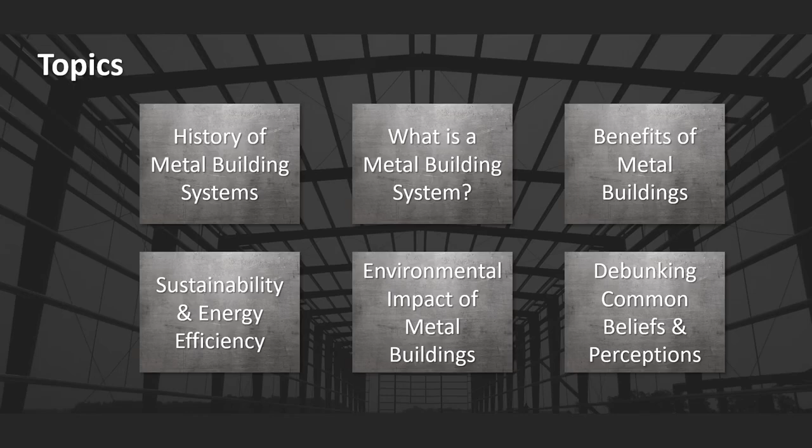So, when did the rise of metal buildings begin? It dates back to 1917 with the Austin Company in Cleveland, Ohio. They had 10 standard designs, which is where the term pre-engineered originated, since the designs were created in advance and were sold as an unmodifiable package.

Then in the 20s and 30s, the oil boom in the West created the need for quick and simple-to-construct buildings to provide storage and basic shelters. The young but burgeoning metal building industry was quick to respond.

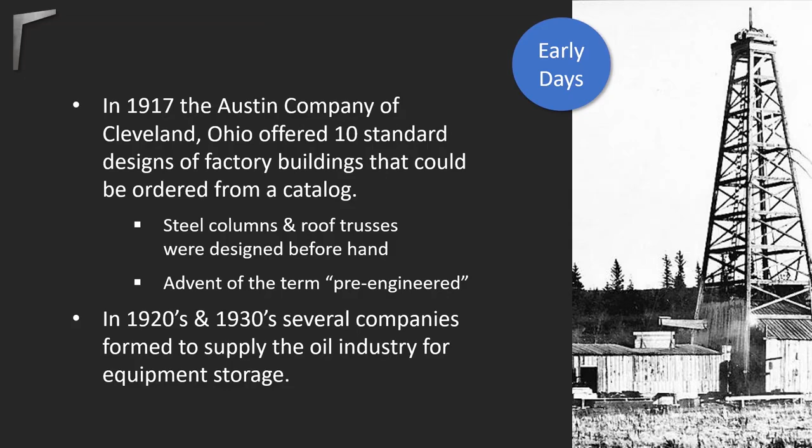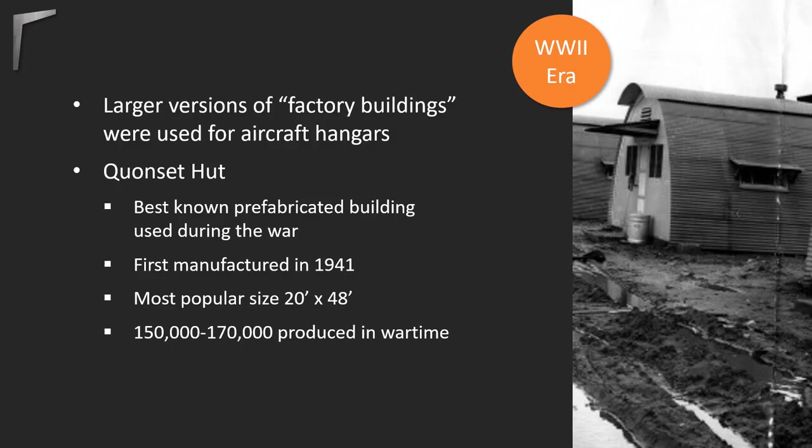The use of metal buildings increased during World War II when large metal buildings were used for aircraft hangars, but most people identify early metal buildings with the venerable Quonset hut. Between 150,000 and 170,000 of them were constructed and in use by the end of the war. They were highly effective because they could be constructed quickly by military personnel and could serve multiple purposes.

What happened next changed the face of the construction industry: the rapid growth of industrialization. The manufacturers that had produced all those Quonset huts needed to shift directions because their main customer, the U.S. Army, no longer needed the building inventory once the war ended.

At that time, building manufacturers began producing low-cost, quickly installed factory buildings that satisfied the post-war economic boom. They were actually called boom factories. The structures were relatively inexpensive utilitarian buildings that served an important purpose. They housed the machinery, systems, and workforce that would provide the products and services that fueled America's rise to prominence as a world superpower. This utilitarian role is still foremost in the minds of some designers today, but metal building technology has evolved to allow for much more.

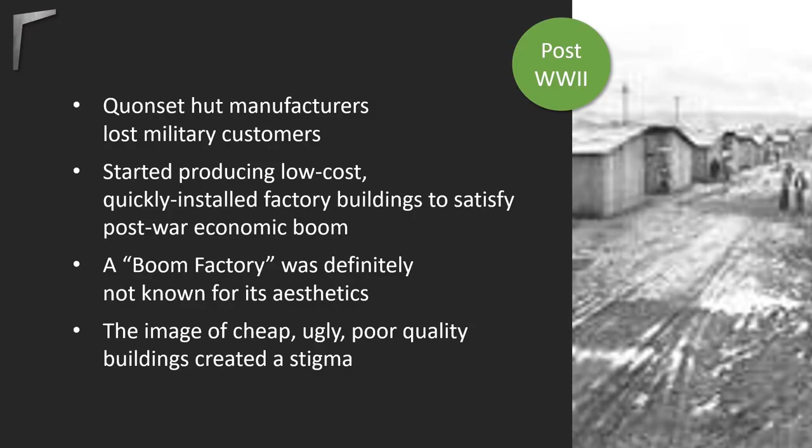A metal building system is a custom-engineered steel solution that optimizes and integrates steel framing, roofing, and walls. It is the most popular low-rise commercial building solution in America.

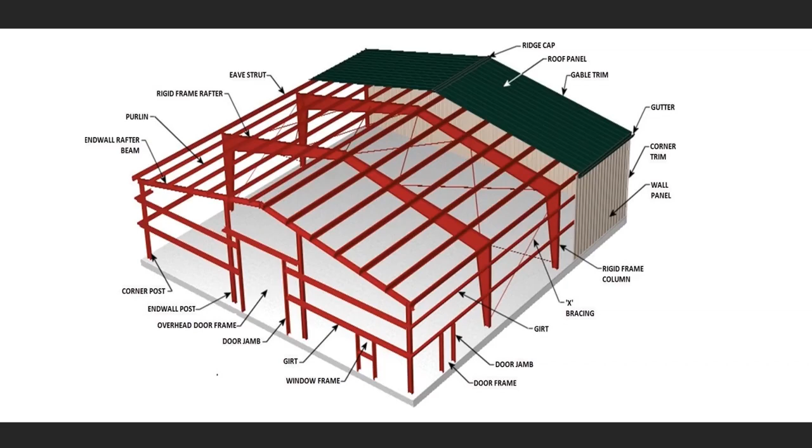The basic elements of the metal building system are primary frames, which are the structural steel members, secondary roof members, which include cold-form steel purlins or steel joists, secondary wall members that are cold-form steel girts, a metal roof, and wall cladding systems. While the interiors and exteriors can look completely different based on the owner's requirements, the basic elements of a metal building system remain constant: rigid frames, wall girts, roof purlins, cladding, and bracing. These common elements provide for economy without hampering design flexibility and creativity in the end product.

One thing that distinguishes metal building systems is their surprising variety due to the flexibility allowed through different combinations of wall materials. In fact, it can be difficult to identify a building as a metal building system from the street. Since the structural steel frame bears the load, there are options for architectural or industrial metal walls, brick, glass, wood, masonry, EIFS, tilt-up, and insulated steel wall panels or other materials.

Metal buildings have evolved from standardized designs to custom designs for every single building produced. Metal building systems employ advanced computer-based engineering and drafting technology to create building solutions that align with each customer's exact needs.

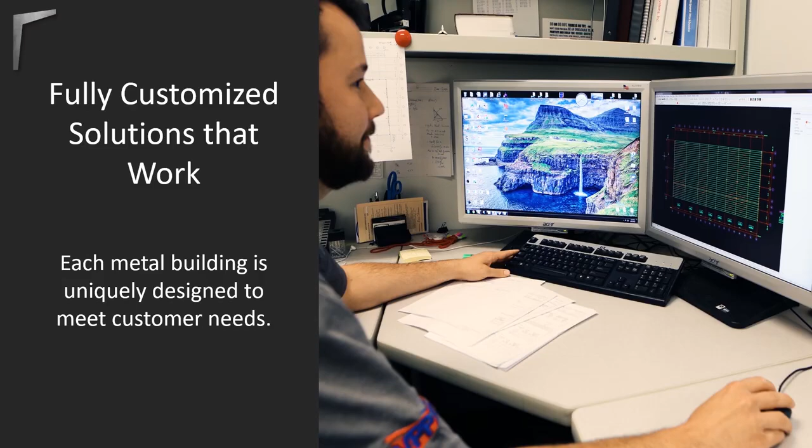One important attribute is design flexibility. The buildings allow for impressive clear spans, eave heights, and easy expansion for a range of building sizes. In using this type of framing system, there are buildings today with clear spans in excess of 400 feet. Large clear span spaces are needed for many applications.

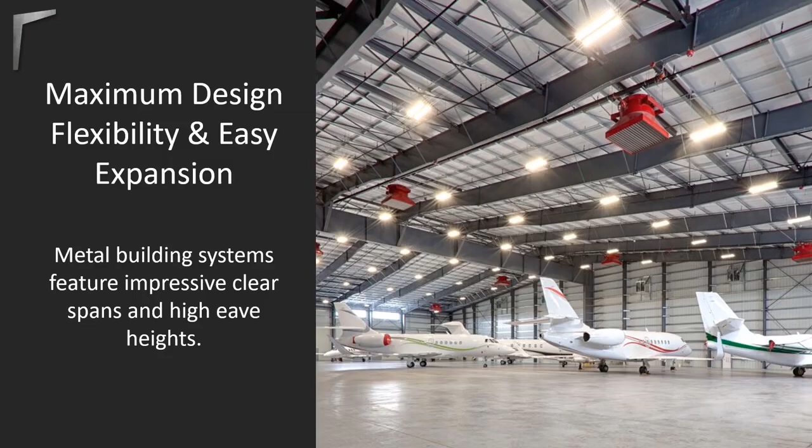For example, metal buildings make practical facilities for housing aircraft and for performing aircraft maintenance. Such wide-open spaces are equally valuable for manufacturing, warehouses, and showrooms. The high eave heights also make for a popular solution for recreation facilities, as well as university, pro football, soccer, and baseball team practice facilities.

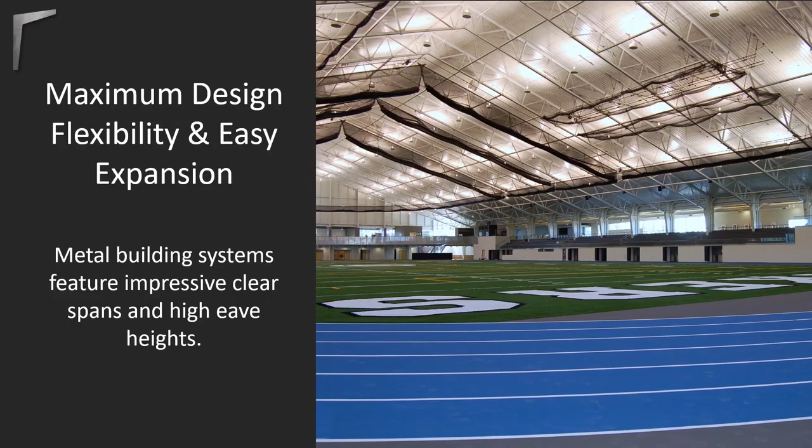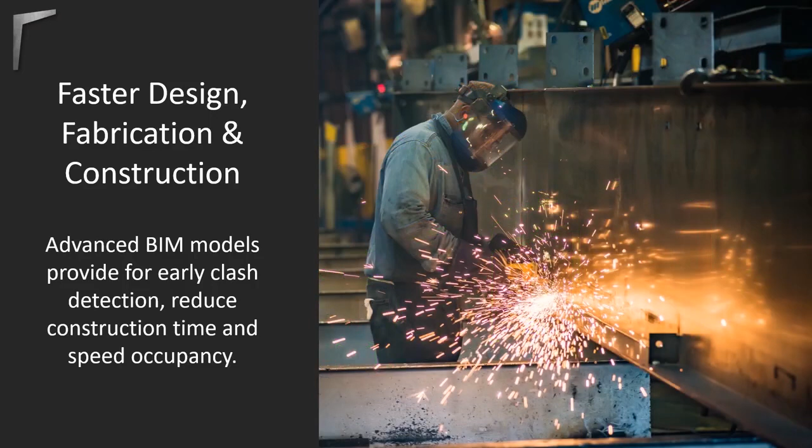Speed of delivery is a key advantage with a metal building. Building information modeling is used by metal building manufacturers to contribute to the overall efficiency of the project and to help integrate and visualize other systems within the building project. Once the building is designed, it can be manufactured in as little as 2 weeks. On a job site, they can be erected quickly.

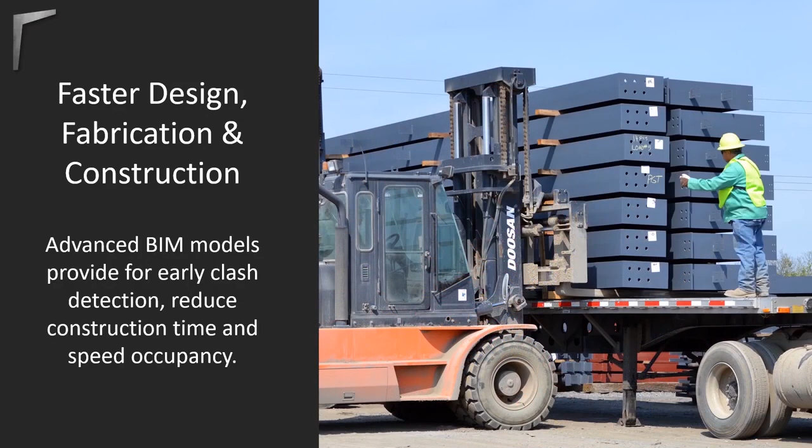The parts and pieces of the complete metal building package are delivered as a single-source package to the job site and received by a qualified erector who shakes out the shipment of materials to ensure everything has arrived. Once the project is staged on the ground, the metal building shell goes up much faster than conventional construction.

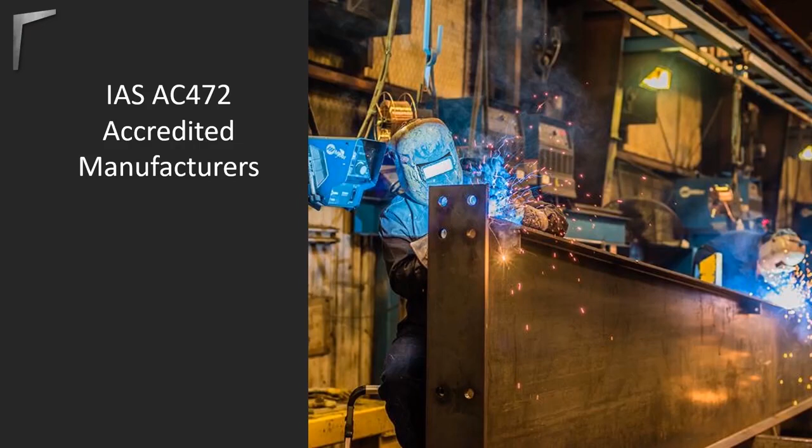Metal building system manufacturing firms that are members of MBMA are accredited under the International Accreditation Services AC 472 Inspection Program for Manufacturers of Metal Building Systems. AC 472 is a comprehensive accreditation program based on the requirements of the International Building Code.

Building owners have found that purchasing a building from an accredited manufacturer provides many benefits. These include compliance with the special inspection requirements in Chapter 17 of the International Building Code, expedited acceptance of plans by code officials, better protection for occupants and contents, lower insurance rates, lower maintenance and utility costs, and better resale value.

Each metal building is designed using lighter cross-sections and higher strength steel than conventionally framed buildings. The optimized tapered steel building frames and the strength and efficiency of lightweight roof and wall framing require less material. Hybrid structures, which incorporate other building materials such as tilt-up walls, can be designed to take advantage of the benefits of metal building systems. By integrating conventional cladding and exteriors, more design opportunities arise.

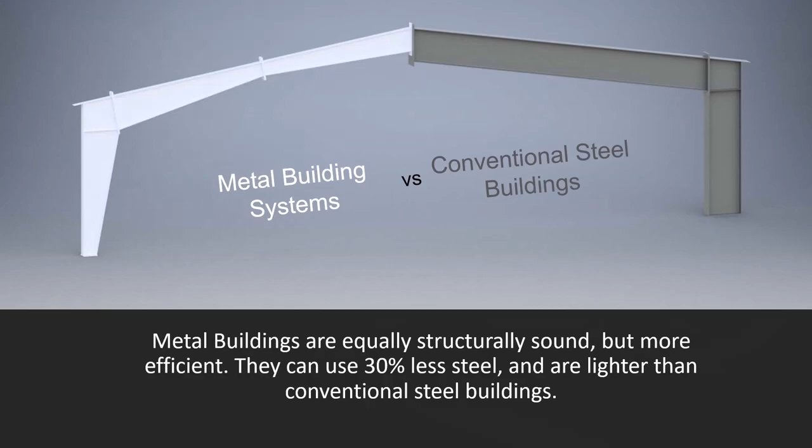A metal building's metal roof can last for many decades. Compared to other roofing materials, metal roofs have extended lifespans, typically 40 years or more, and are completely recyclable when they finally need to be replaced.

Metal buildings and metal roofs do not support mold growth, do not rust or decay, and are designed to accommodate temperature fluctuations. In addition, standing seam metal roofs are excellent platforms for attaching solar panels. The panels can be easily attached to upright standing seams using non-penetrating clamps. Furthermore, the long life of a metal roof will outlast the life of the solar panels and eliminate costs and complications of re-roofing with an in-place solar grid.

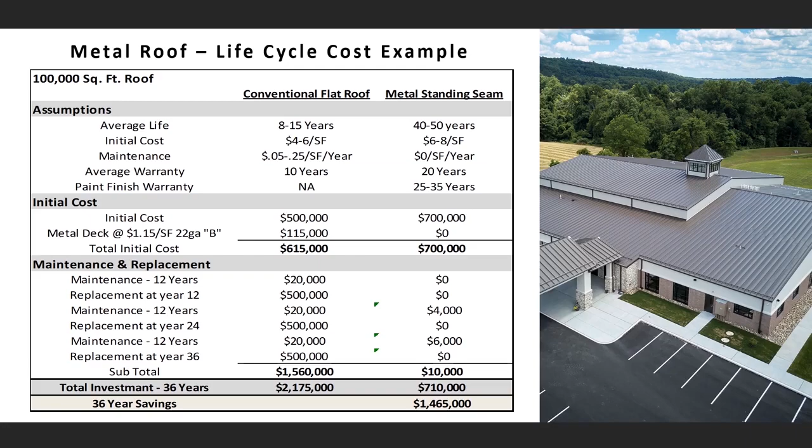Life cycle costs include the initial cost and required maintenance. When these are factored into the overall value of a roof, metal standing seam roofs are proven to be the most economical investment. As you can see in this analysis, metal roofing provides consistent long-term savings. Most studies have shown that a metal roof system will have a life expectancy of 40 to 50 years, long outlasting conventional roofing systems, which average 8 to 15 years.

Now let's address how metal buildings can provide energy-efficient solutions and minimize environmental impact.

When considering the environment, you may not know that steel is the most recycled material on the planet, and that a typical metal building is produced from between 50 and 55% recycled steel. In addition, recycled steel production requires significantly less energy than conventional steel production.

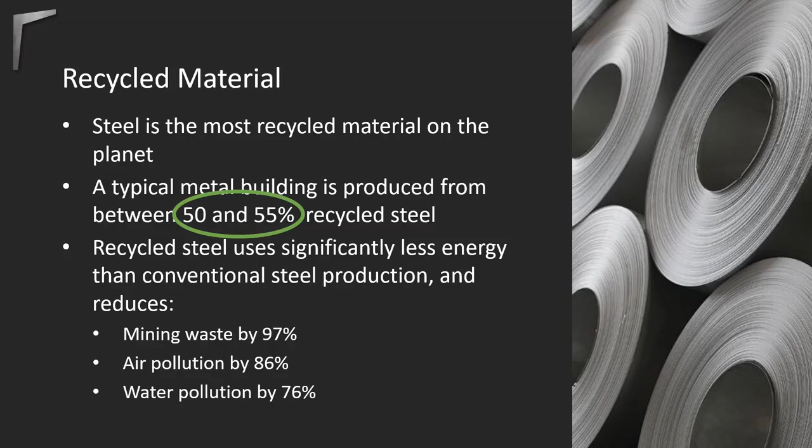Here are some additional interesting facts. Metal buildings generate just 6% in scrap material, and even that is reused or recycled. Building erection is much faster than conventional construction, by about 30%. Metal building design and construction processes are more efficient, by some 25%. Job site waste is minimal, because the primary building components are manufactured in a quality-controlled factory setting, so all parts come to the site at the exact size that is needed.

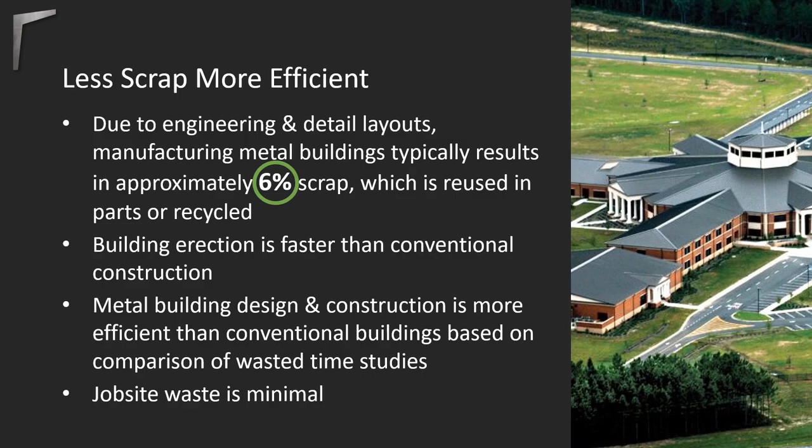MBMA has funded extensive research related to the environmental impacts of metal building systems. Most recently, MBMA sponsored a third-party verified life cycle assessment. In addition, through collaboration with the Athena Sustainable Materials Institute and UL Environment, MBMA developed an industry-wide life cycle assessment report and 3 industry-wide environmental product declarations for designers to use when specifying MBMA member products.

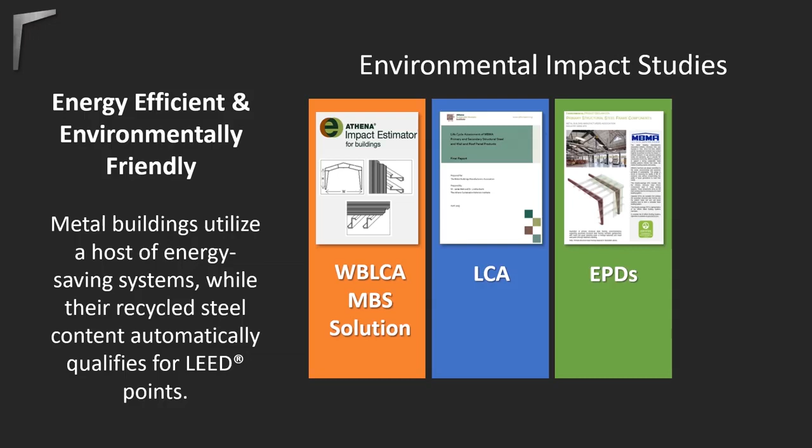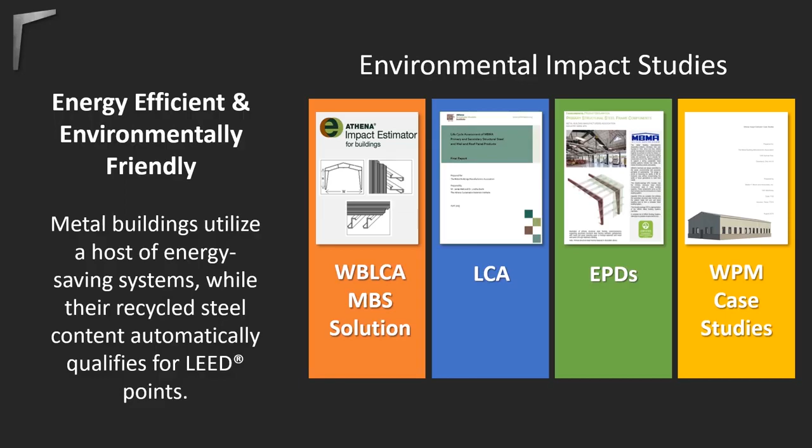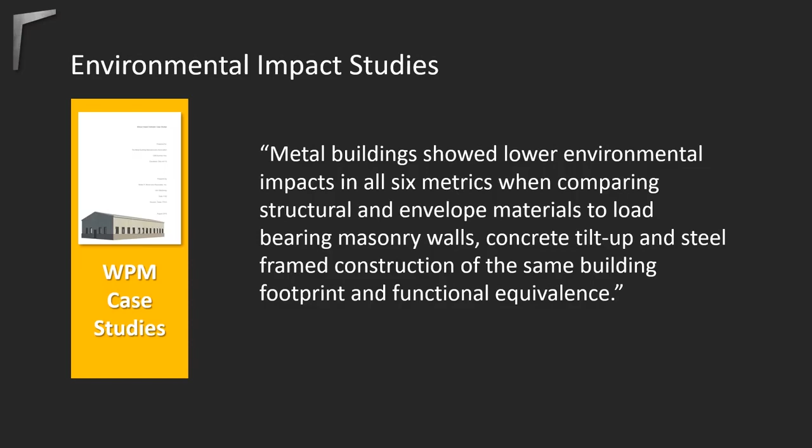A life cycle assessment comparison of buildings with different structural and envelope materials was produced independently by the engineering firm of Walter P. Moore and Associates. The resulting report concluded that metal buildings showed lower environmental impacts in all 6 metrics when comparing structural and envelope materials to load-bearing masonry walls, concrete tilt-up and steel frame construction of the same building footprint, and functional equivalence. All of these environmental documents are available for free download at mbma.com.

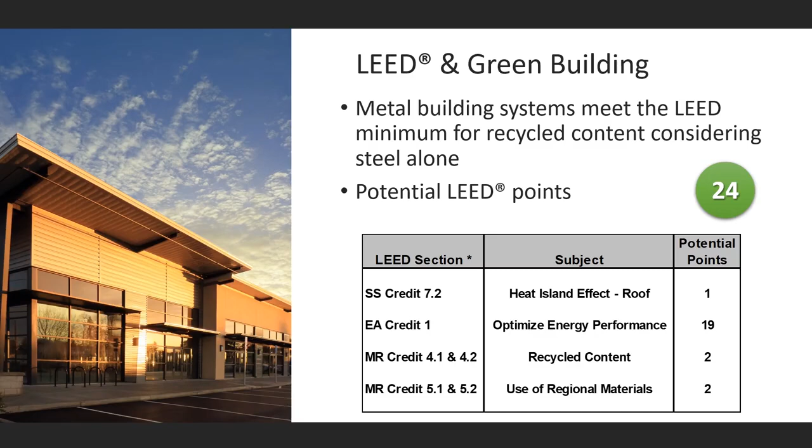Another energy attribute with metal buildings is that they are eligible for the U.S. Green Building Council's LEED points. As you can see in this chart, metal buildings alone can provide up to 24 LEED points of the 40 or more needed for certification. This obviously makes metal a very attractive choice for any environmentally conscious client.

There are numerous fiberglass insulation systems that can be used in metal buildings that meet or exceed energy code requirements and also provide sound absorption for use in occupancies like offices or schools. Fiberglass insulation systems are available to insulate between metal panels and purlins and girts, and as efficient fiberglass assemblies can fill the cavity between purlins and girts.

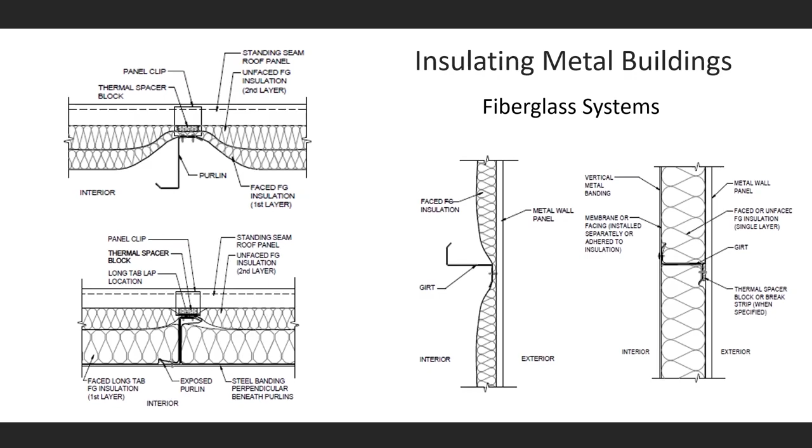A summary of available systems can be found in the MBMA Energy Design Guide for Metal Building Systems, 2nd edition, as well as in the MBMA Guide for Metal Building Contractors on Energy Code Compliance, which is available as a free download at www.mbma.com. In addition, MBMA has sponsored extensive testing on the acoustical performance of these systems, which can also be found at mbma.com.

Insulated metal panels are available that serve as the building envelope while providing energy efficiency. This slide shows you some of the attributes of factory insulated metal panels. No gaps, no cavities, no crushed insulation. In addition, hidden fasteners provide a sleek look. Textured coatings also offer design opportunities.

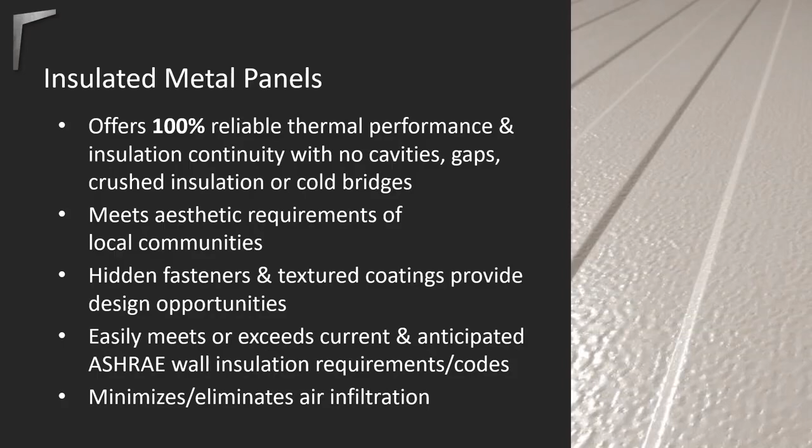In recent years, lighter colored roofs reduce heat absorption and energy usage in sunnier climates. Premium cool coatings for metal substrates provide improved reflectivity, which helps reduce energy consumption. In fact, the coating increases the reflectivity of medium to darker colors to a level that will meet the Energy Star program specifications for cool roofs.

Research from the U.S. Department of Energy shows that 1 additional percentage of reflectivity in a coating on average will reduce roof temperature by 1 degree. So, you can see how valuable the improved product technology becomes. Cool metal roofing will last for decades without colors fading, and the surface of metal roofs is resilient and resists dirt and biological buildup, which keeps a metal roof cool longer than other roof types where soil and algae can form.

Now let's address misperceptions that have spilled over from the Quonset hut days. Perhaps you've heard some of these myths. Now you can hear what's accurate.

Will a metal building limit your flexibility? No. Every metal building is unique and customized to the needs of each owner. Each can incorporate virtually any dimension, so meeting a company's special needs is not a high-priced add-on.

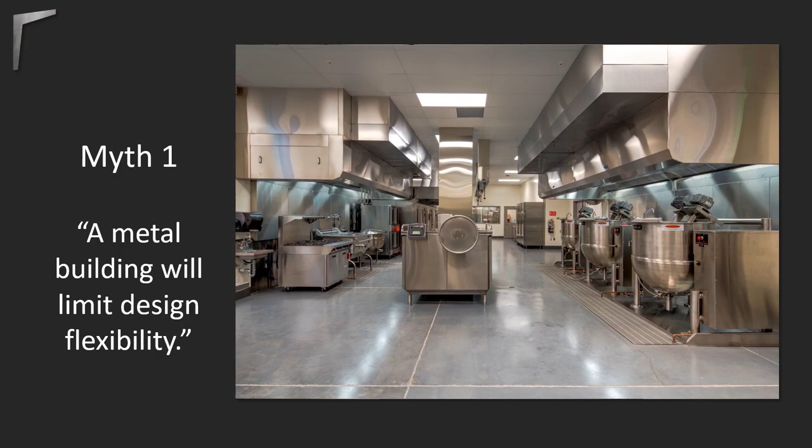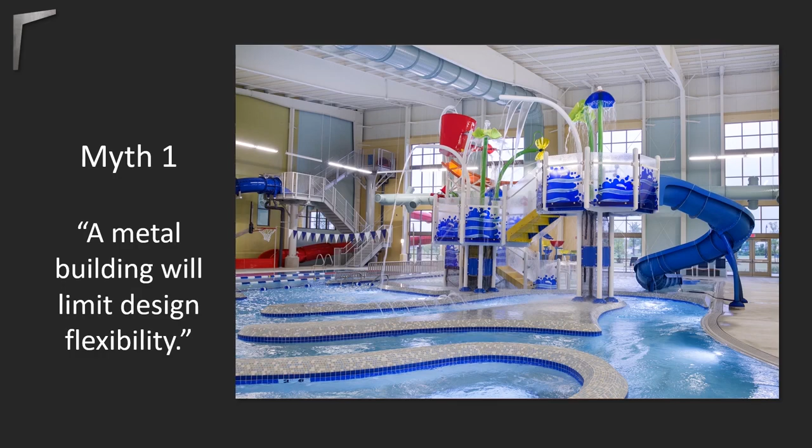A metal building structural system provides maximum flexibility to create a variety of floor plan configurations: L's, U's, squares, rectangles, and more. Column-free interior space allows complete freedom in the design of showrooms, offices, retail space, and so much more. In addition, the steel spans of a metal framing system are designed to easily reconfigure building areas, allowing quick accommodation for changes in function, ownership, equipment, and regulations.

Ease of expansion can be built right into the original design. Mechanical additions and interior electrical layout alternatives are also feasible because of the framing advantages.

Will they limit your creativity? Absolutely not. Metal buildings often receive design awards. In addition to traditional metal panels, the exteriors can be clad in almost any material, including brick, precast concrete, stone, wood, aluminum, or glass. On the interior, metal buildings provide easy adaptability, with the steel spans allowing for creative and interchangeable interior designs.

Neil Van Loo, with Blaine's Farm and Fleet, acknowledged the myth when he said, quote, 'Our architect was against using a metal building system because he thought the design would be a square, fixed-dimension tin box. We had to sit down and review the plans with him in order for him to realize the benefits of a metal building system,' unquote.

Do metal buildings have climate limitations? Not at all. MBMA has sponsored research to evaluate the performance of metal buildings under extreme loads, such as drifting snow, earthquakes, and hurricane-force winds.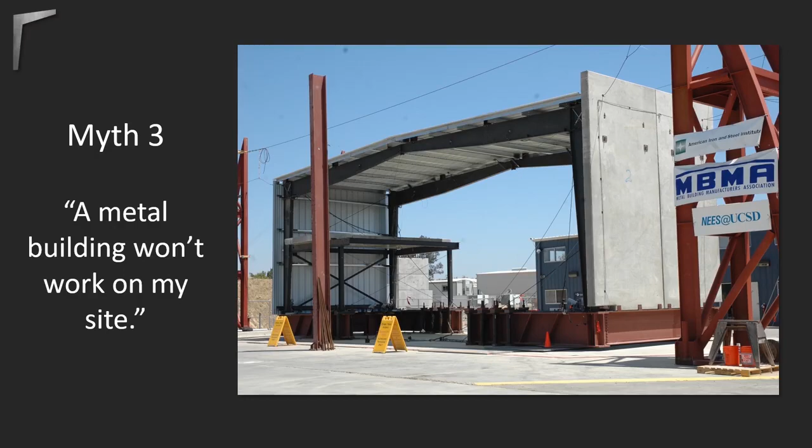For example, full-scale metal buildings were subjected to severe earthquakes beyond the code requirements in shake table tests at the University of California, San Diego, and performed beyond expectations with no collapse. Metal buildings can be designed for the environmental loads that are specified in the governing code or any other specified loading that may be pertinent to a project.

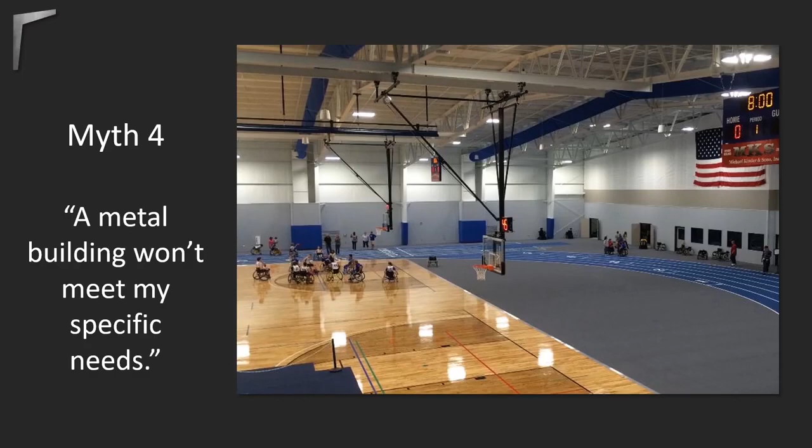Do you or your client think that metal buildings can't meet your needs? Today, just about any 1- or 2-story facility can be suitable for metal. Consider that metal buildings are used for a variety of amazing facilities, from indoor skydiving space to entire corporate campuses.

What distinguishes this type of construction today is its surprising aesthetic variety due to the flexibility allowed through different combinations of a system's basic elements.

And then there are zoning ordinances. Because today's metal buildings offer so many options for exterior facades, zoning boards have changed with the times. In fact, zoning boards are now approving and permitting metal building systems for all types of end-use applications. If you need help in educating your zoning board, MBMA has resources and people to help you.

Is tilt-up concrete construction compatible with metal buildings? Of course. The use of steel framing in a building does not rule out using concrete walls. In large or sophisticated projects, different raw materials and construction methods are frequently used together.

For example, a large steel office building or retail center may use tilt-wall concrete for exterior facades, or masonry block walls as interior fire separation walls. A distribution center might use concrete blocks but add a steel roofing system and a rigid frame similar to what a traditional metal building would use.

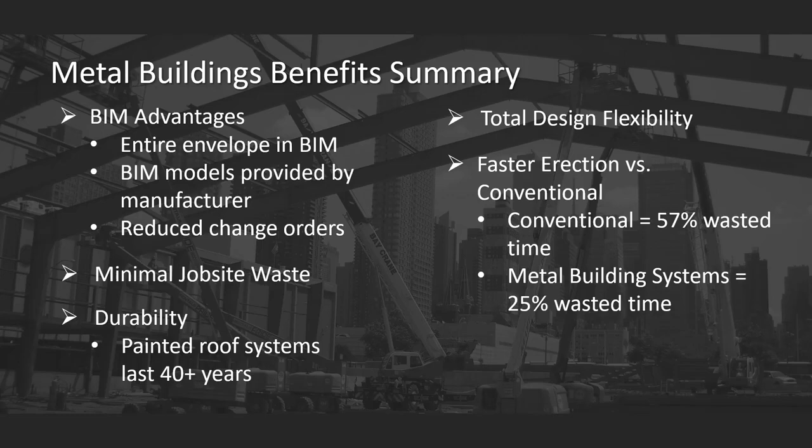Last but not least, metal buildings are a sustainable solution that can meet the most stringent project specifications required by USGBC or Green Globes, and the industry has documented its performance through industry-wide environmental product declarations.

Finally, no other industry documents its commitment to quality like the metal building industry. MBMA-affiliated manufacturers are required to achieve AC 472 accreditation from the International Accreditation Service, which includes on-site plant audits twice each year.